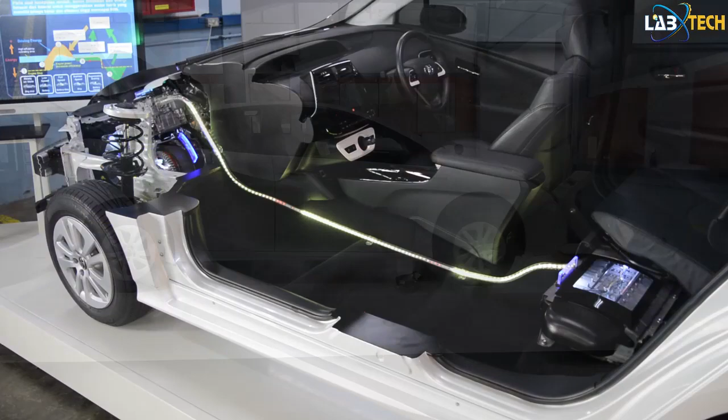This amazing piece of kit is also connected to a computer showing digital animation. Today we'll run through a quick demonstration video between Nyoman and I. So Nyoman, can you turn this on for us, please?

Sure. We have the control panel here to control everything - the software and also all the parts in the vehicle.

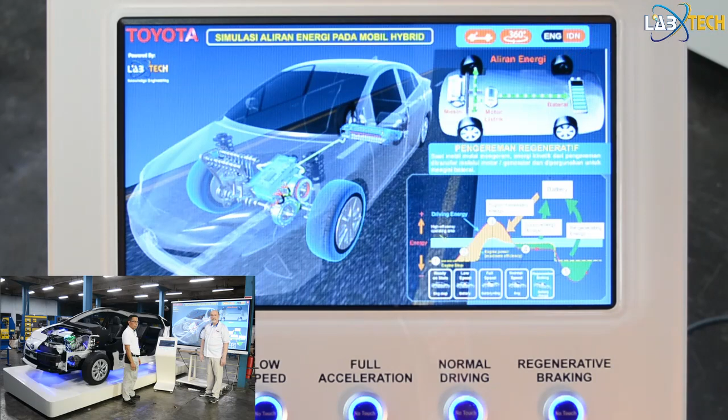As you can see, this is in Bahasa Indonesia, because this is going into a Toyota Experience Center in Jakarta where the public can be educated about hybrid vehicles - how a hybrid vehicle functions, what the technology is, why it's important to you as a consumer, what advantages a hybrid vehicle offers. Part of understanding those advantages is understanding the technology behind it.

It's complicated - hybrid vehicles are the most complicated vehicles on the road, the only ones combining mechanical and electrical items. The control and interface is quite astounding. We have a diagram here. Let's change the language - we're going to put this to English now. Now it's in English, as you can see.

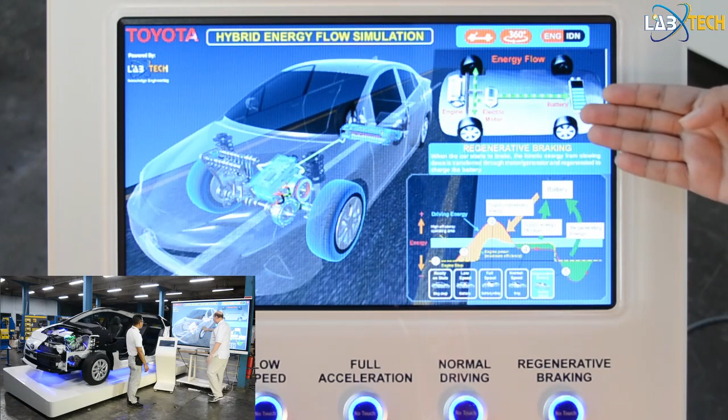We have a digital rendering of the Prius Generation 4 here, done by our digital department. We have modelers and scanners - we've been scanning in the 3D parts, modeling them and animating them. The digital modelers have created 5 different states of operation, the common ones. This is the easy way to understand this. The first is the ready on state.

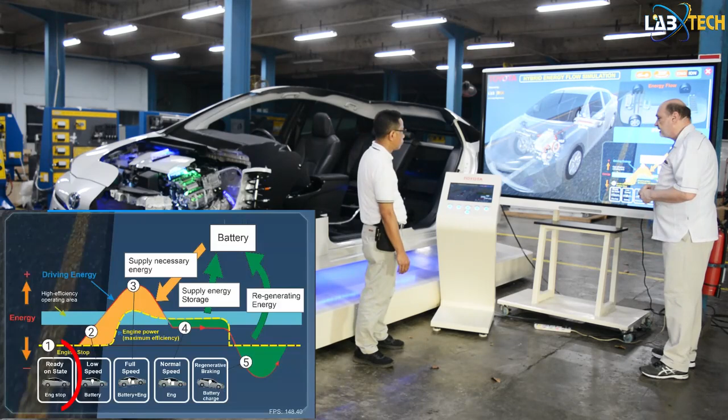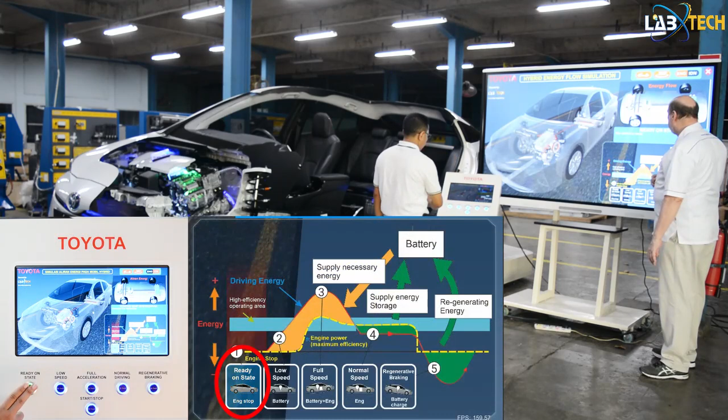Are we in the steady on state right now, Nyoman? Yes, exactly - this is the start position. So I will move it to the ready on state. Ready on state - okay, now as you can see, the lights have come alive. Tell us about the LEDs, Nyoman, what they're for.

So basically, as we've seen on the 3D modeling of the Toyota Prius, they have a high voltage battery over here - this is the battery. Then we have other components: the power control unit, the motor generator 2, the motor generator 1, and the power split device or PSD. And also the engine - that's actually the main components of the Toyota hybrid.

So you're saying it's got one engine - a petrol engine in this case, and we have 2 electrical motors, right? So what's the difference between these 2 motors? Why do we have 2, why not just 1? Very good question.

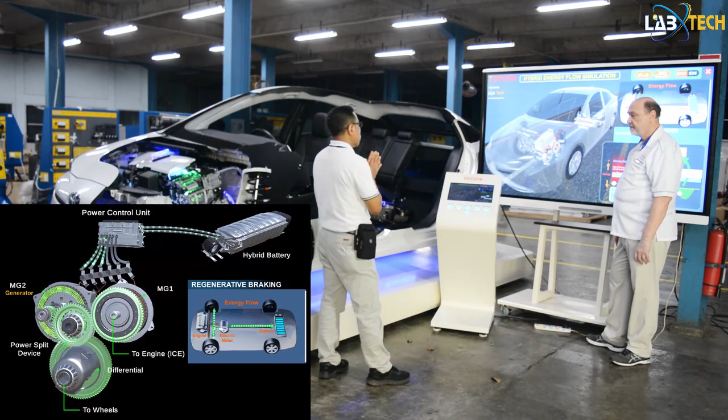So there are 2 motor generators - each is a motor and can also be used as a generator. Motor generator 1 is connected directly to the engine, so it's used to start the engine. This hybrid car doesn't use a special starting motor - there's no separate starter motor, MG1 is the starter motor.

So that's MG1, and MG2 is actually the main motor of the hybrid system, used to drive the wheels during low speed and during full acceleration. MG2 is also very important during braking, because it's used to regenerate power from the wheels - the energy from the wheels is reused to charge the battery.

That's amazing - so we'll see how these things work as we go through these modes. Let's try the first mode to see what happens, so we have low speed. We have a touchless control, by the way, because this is the period of COVID, so this is a no-touch display here.

Right, pretty interesting. So okay, you can see that this is flashing. We're now in low speed here.

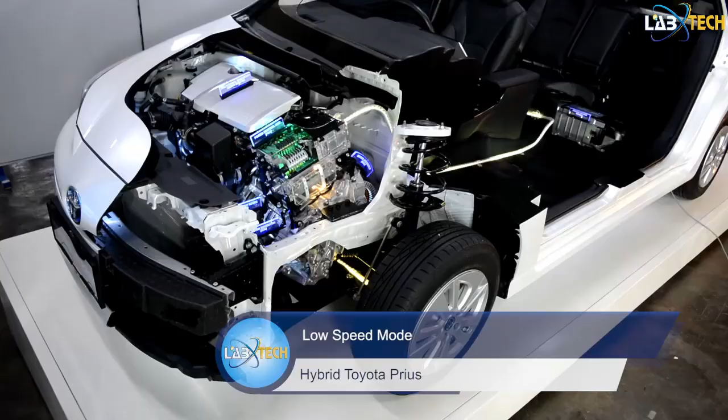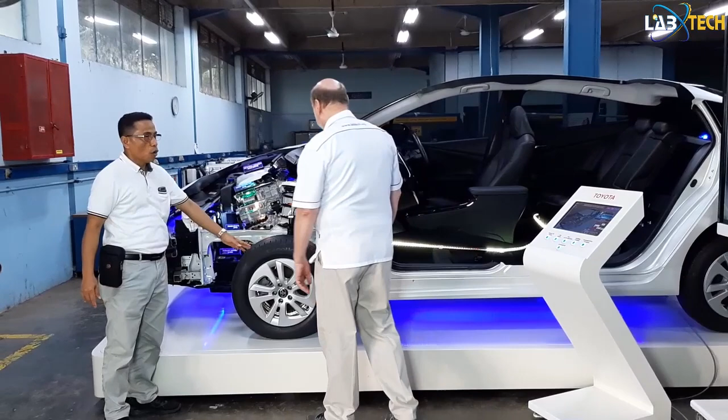So this is when you are just moving at low speed. The low speed actually in the Toyota hybrid uses the power from the battery, the energy from the battery. So we can see the energy flow from the battery is directly to the PCU, and drive the MG2 to drive the wheels. While during the low speed we use the battery.

This is also the simulation of the rotation of the wheels. So during low speed, the hybrid car uses the battery because during low speed the engine is not very efficient. The torque of the engine is low during low speed. That's why the motor is more useful, because if you have a power torque curve for an engine, at low speed it's not very efficient.

It's only when you get up to 2,000 or so RPMs and above that it takes off. That's why we have transmissions. So that's why electric vehicles are much more efficient - they don't have transmissions, do they? Exactly, because their torque curve is just flat. So that's why during low speed, it uses the power from the battery.

So you get the best of both worlds here, and the extended range of having a petrol engine.

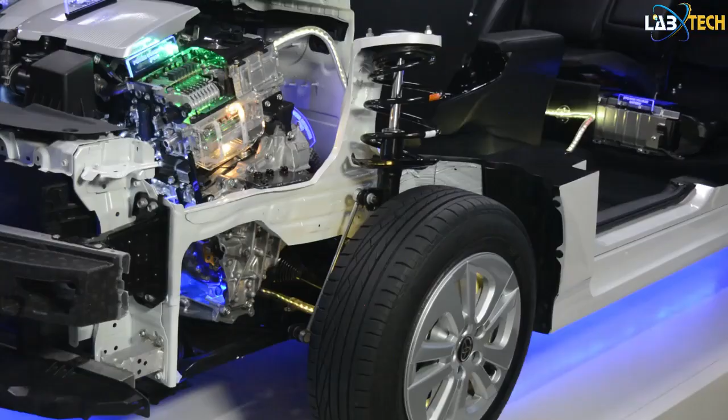Cool. So the flow we can see from the battery is the green color. It goes through the PCU and down to the motor generator 2, MG2, and then goes to the wheels.

And there's a special device that when we take a close-up you can't quite see it, but we have other sectioned items that show this - what we call here, the PSD. And that takes power from everything and transmits it to the wheels.

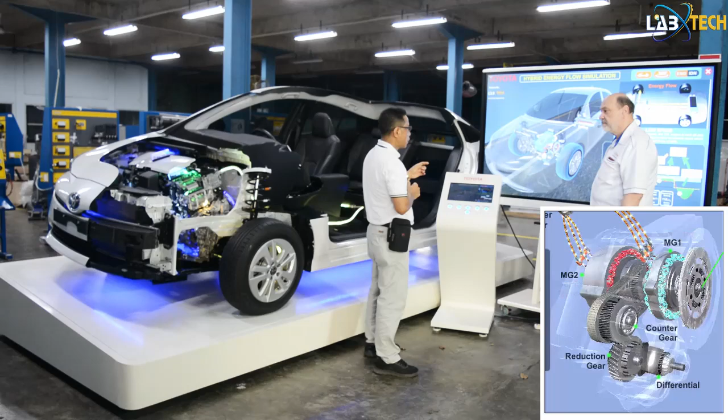You're exactly right. So the PSD, the power split device, combines the power from the engine and from the battery. It's the most important part in the hybrid transaxle, because during regenerative braking it's used to transfer the energy from the wheels to the motor generator two. But especially during normal speed when the engine is running, it actually connects the engine to the MG1.

So that's why we see that shaft connecting to the MG1 there. It's actually a kind of CVT transmission, so it doesn't have gears to change first, second, or third gear. It's running like a CVT, a continuously variable transmission.

That's about the closest thing we have, because this is unique to a hybrid vehicle, the PSD. It's kind of an evolution of a CVT.

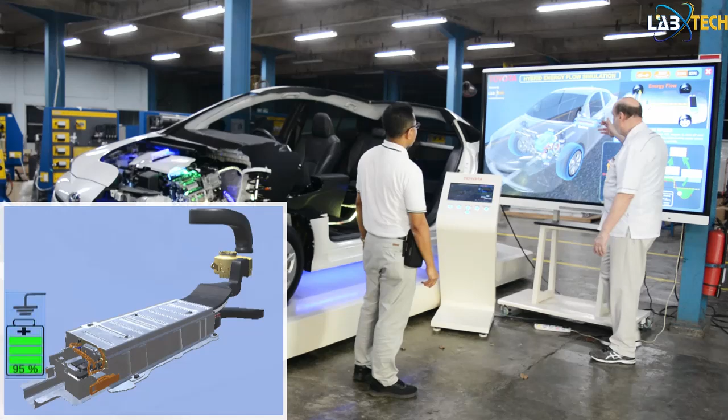Interesting. So this is low speed. In summary, low speed, we have the energy coming from the battery and powering the wheels, and this would be like you're going 5, 10, 20 kilometers an hour, not so fast, and not accelerating too much. Because the earlier versions of hybrids were known to be rather sluggish, and they didn't accelerate very well. But now that problem has really been overcome, where they can be quite quick, actually.

And particularly Generation 4 is a fantastic vehicle. The hybrid call it EV mode. And they've been developing where future hybrids will be able to be plugged in and the battery charged up just like an EV. So they'll have slightly larger batteries in the future, and they could be more EV mode.

Okay, so let's go then to the next one, which is full acceleration mode. After the low speed, usually we have to accelerate the car to go faster, to pass somebody, and take off. So let's see what happens - full acceleration mode.

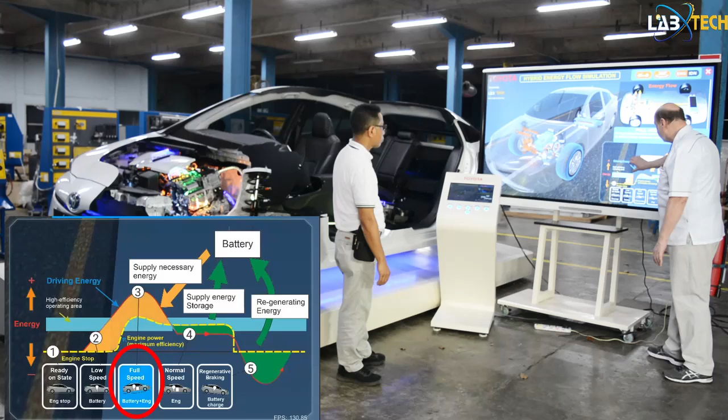Okay, so now we're in full acceleration mode. You see it's in this portion of the function, and we can see that now you're in accelerating mode where you have maximum engine power. And to do this, as I understand it, the MG1 and the petrol engine come to life - it's started by the MG1, because it's not running yet. So that starts it, and then you've got both power sources together. Is that what's going on? So show us on the engine here.

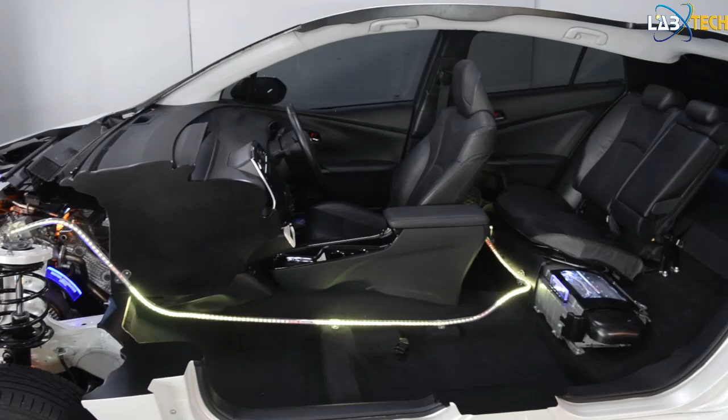From the lighting system, we can see here the energy flow. Energy comes from the battery, still using the energy from the battery, and at the same time the engine is running to supply more energy, so it is actually double the power.

So during this mode we can feel very responsive acceleration, very quick and very responsive. So the energy comes from the engine and also from the battery. The modes are controlled by the power control unit, which decides for you according to the program.

We're relating what's happening theoretically and in an animation to the physical vehicle here, which makes this display just so amazing. I mean, it took me quite a while, my background is automotive, to really understand what the hybrids were about.

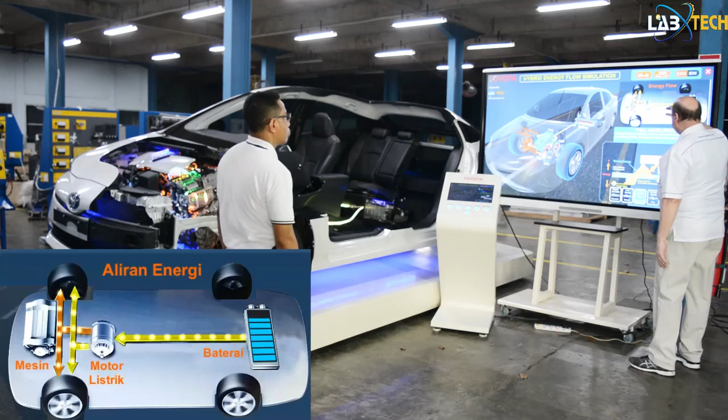This just makes it so any person could understand it, doesn't it? Yeah, right. And you can see here also there's another diagram which shows the functions. So right now we're getting battery energy, we're getting engine energy, and in the low speed mode the engine wasn't happening during this.

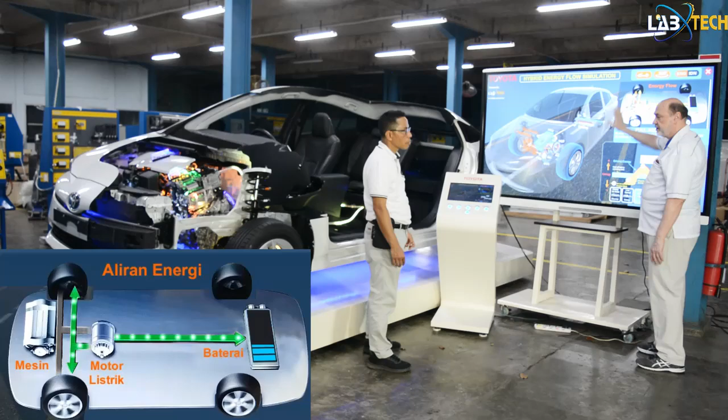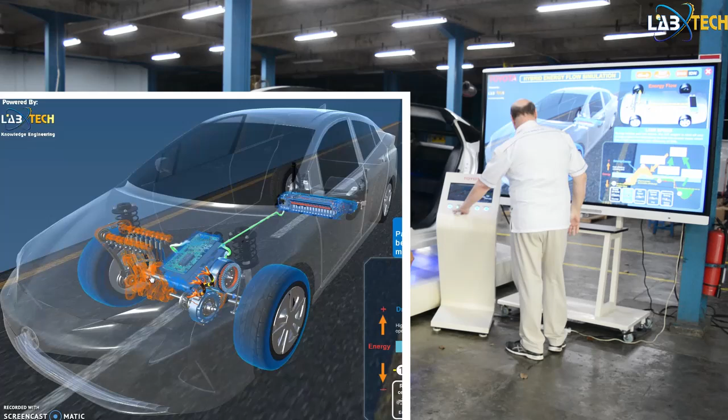And this is actually a very useful thing. You can see that the engine is now alive and running in this mode, whereas before it is not running. So in low speed this is off now, it's not running. So we go back to full acceleration. So it's really only during that acceleration you're now using the engine that much.

When else does the engine come on? Okay, very good question, sir. So the engine actually will run very efficiently during a certain speed, for example above 2000 RPM, the engine runs very efficient. So we can see from this chart, the engine power maximum efficiency here. So at that state, the hybrid system uses the engine to power the vehicle.

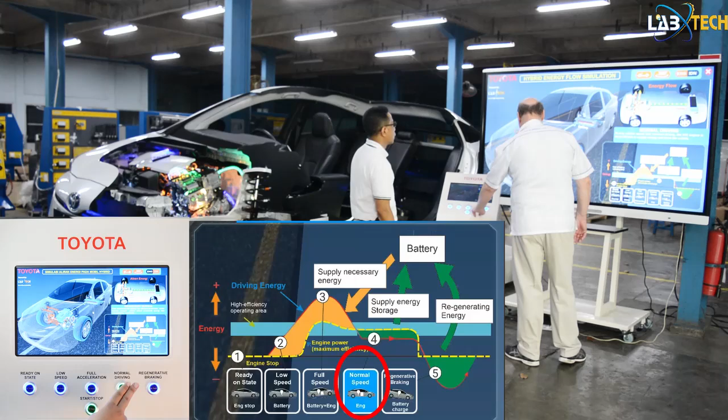Right, so is that what's happening during normal driving? Exactly, so here we're now on normal driving. Okay, I see what you're saying. So in normal driving, the engine is still on, but it's not using much, it's cruising, like you're cruising down the road at 100 kilometers an hour or 55 miles an hour, and you're not accelerating, you're just barely at that point.

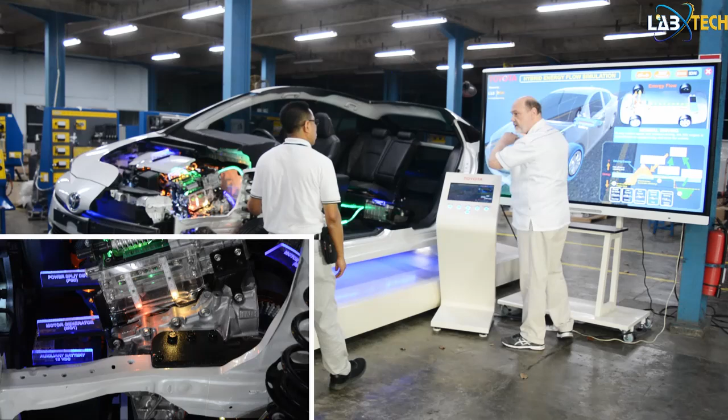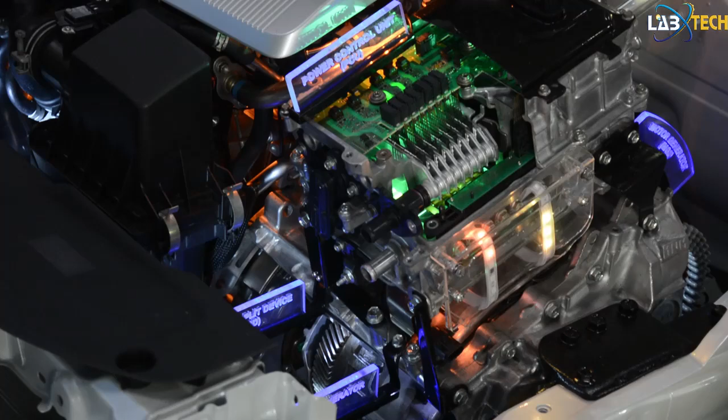So because during the acceleration we use the power from the battery, we use the energy from the battery, and during the low speed we use the energy from the battery, that means the level of the battery state will be reduced. So we need to charge the battery sometimes, and in this case the engine will charge the battery.

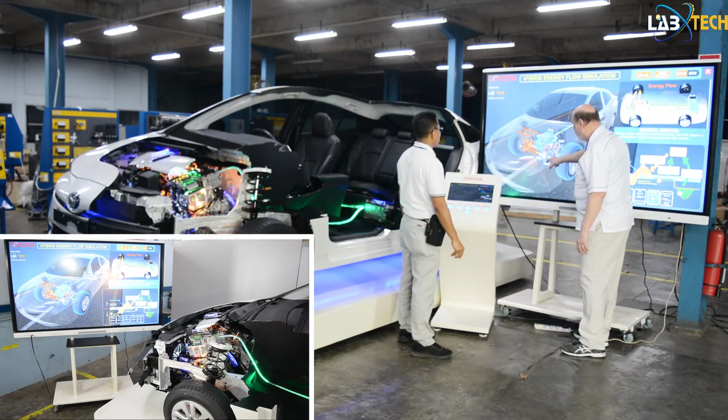So it's going through the MG1 in this case, and then the electricity is flowing back, and you can see the battery is filling up here. Back, yes, here, right, and also here.

The other thing also, once the battery is full, the energy from the engine also splits to add power to the MG2, and then gives more power to the wheels. So that's actually the function of the PCU and also the PSD during that time.

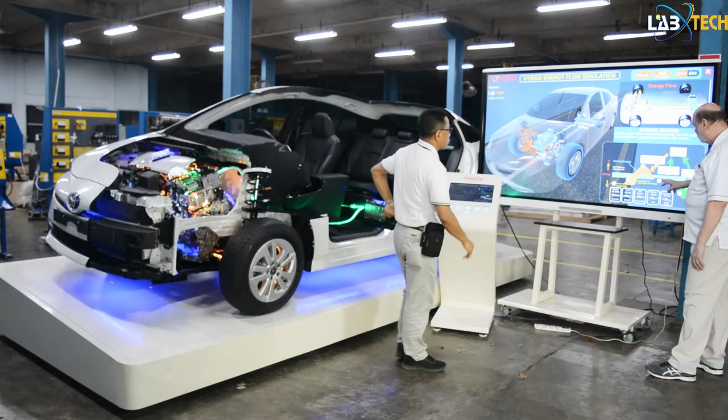So as we can see here, during normal driving, you're in this area where excess power is being stored back to the battery, and that's why you have such a long range in this. You're really just only using the engine when you need it, and you can go long distances in a Prius right now. You can go much farther than you can in electric vehicles, and plus you don't have to actually plug in, you just top up a little bit of gas or petrol, and away you go.

They're fantastic for long trips, and very economical too, in terms of miles per gallon or kilometers per liter. In normal driving, it will be much more efficient compared to the conventional engine, almost double, maybe 25 to 30 kilometers per liter, whereas normally it might be 14 kilometers per liter.

This one is 30 kilometers per liter. It's very efficient, double the performance, so it only takes half the fuel. But they're not twice the cost of a normal vehicle, just a little bit more.

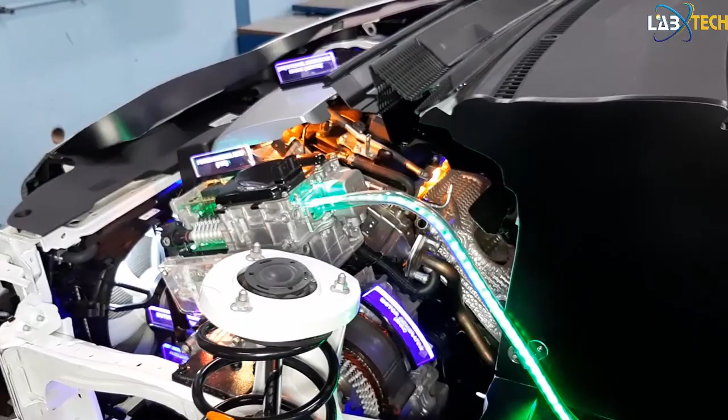In some cases they're not more at all, because particularly with Toyota you're getting a great vehicle, offered also in the Camry. There's hybrid, and it's not just the Prius, this technology is similar. The Camry and more and more Toyota cars are using the hybrid technology. I think they have some of the best hybrid technology around. They were one of the early ones, and they really put a lot into the development.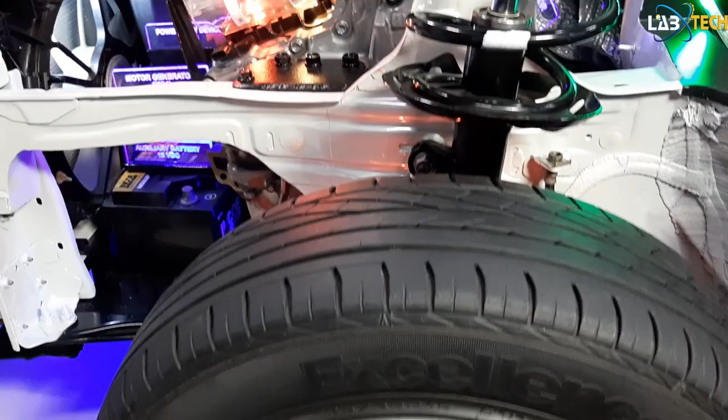So we've gone through normal, and we've got one more state here. I think this is always one of the most interesting ones: this is regenerative braking. Let's try that and tell us what's going on here for regenerative braking.

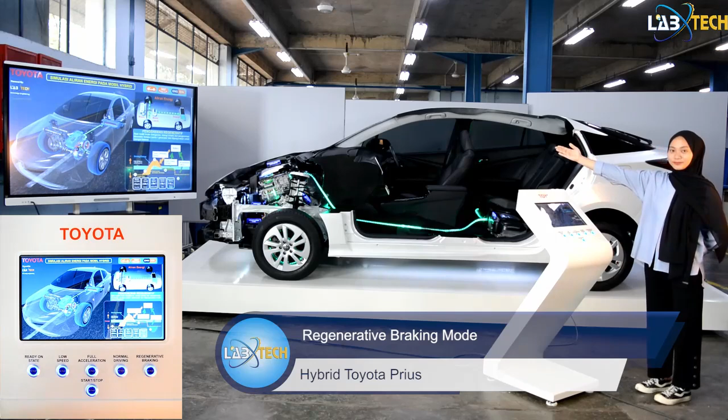From the diagram we see the energy flow from the wheels to the motor, then goes to the battery. Here we can see it also goes from the wheels to MG2, to the PCU, and then to the battery. The green color means the regenerative energy comes from the wheels, goes to motor generator 2, then to the PCU, power control unit, and recharges the battery. So when this is happening and you're actually braking, when you push on that brake pedal...

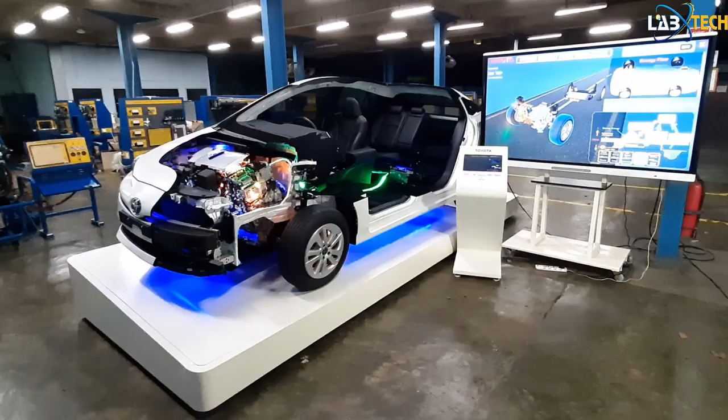Are the brakes actually working? That's a very good question. For the hybrid vehicle, even when we release the accelerator pedal, it is braking. You can feel it brake. So it uses the waste energy from the wheels to recharge the battery. When you brake, you really don't have to push on the brake pedal, you just let off the accelerator, and because you're telling the PCU there's no energy that you want, it just starts to stop, but not terribly fast, at a moderate rate.

So if you just want to slow down, you don't even have to tap on the brake. Right, but when we press the brake, that activates the brakes. Very interesting—you can see all that energy is captured and put back into the battery. It really captures a lot of the energy from stopping the momentum of the car and puts it back into the battery. The good point here is there is no wasted energy, all energy is used. It's a very green car, isn't it? Yes, really green.

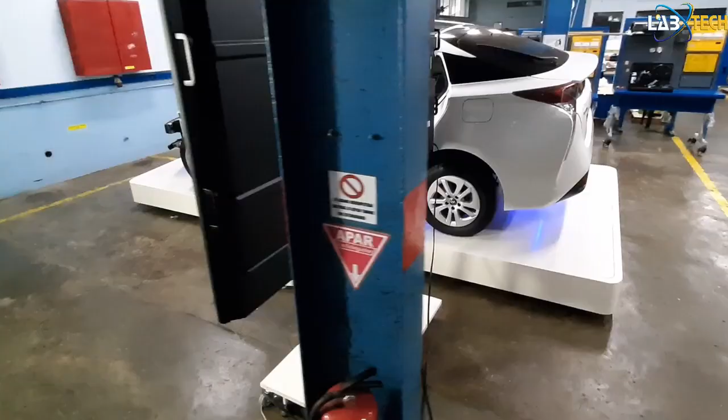We've had a lot of fun doing this project together with Toyota. It's really pushed our R&D department, which is why Nyoman is here with me today to explain this, integrating and developing this beautiful system, which is finished with a beautiful pearl finish that's absolutely iridescent—the camera doesn't do it justice—integrating the control panels with animations and the vehicle to make this fantastic educational experience.

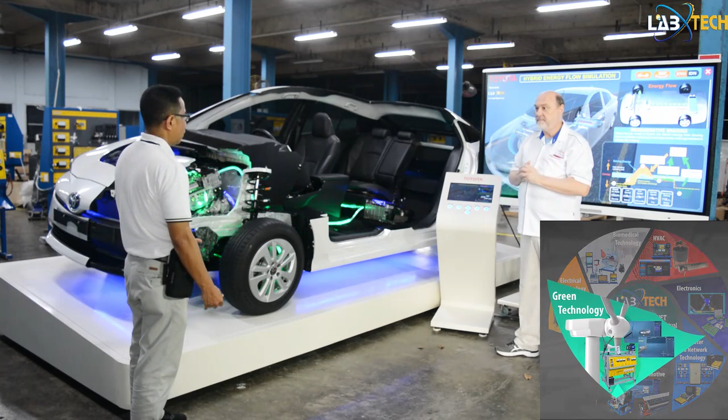Some of this technology, for our viewers who know LabTech, know that we do sectioned items, simulations, simulators, testing equipment and training equipment for automotive, electrical, IT, electronics, air conditioning, refrigeration, renewable energies, green—in fact this is part of our green and automotive lineup, both. It uses everything: electrical, electronic, it's a computer on wheels, it's also automotive. But automotive is becoming more electrical, electronic, and IT.

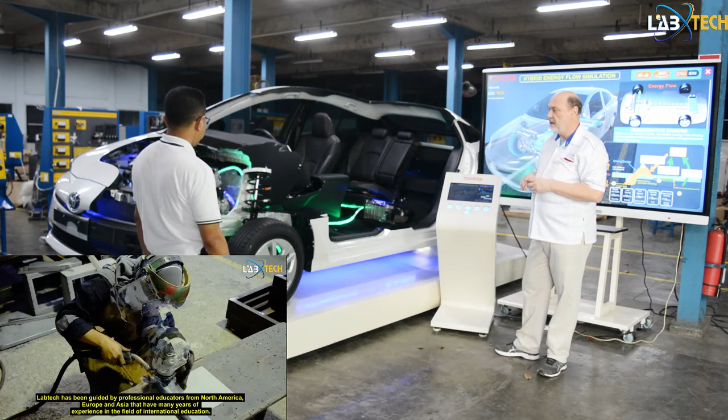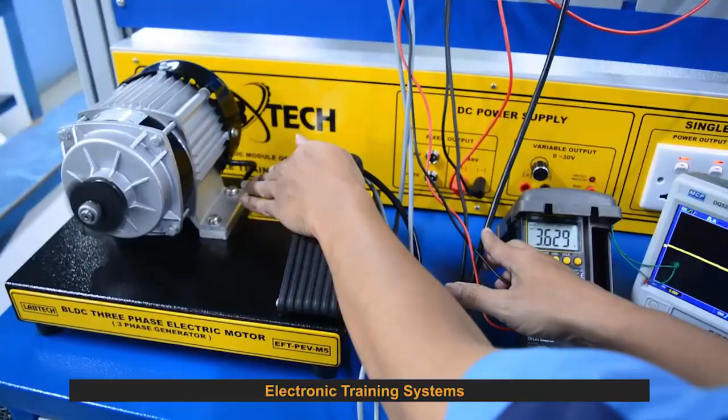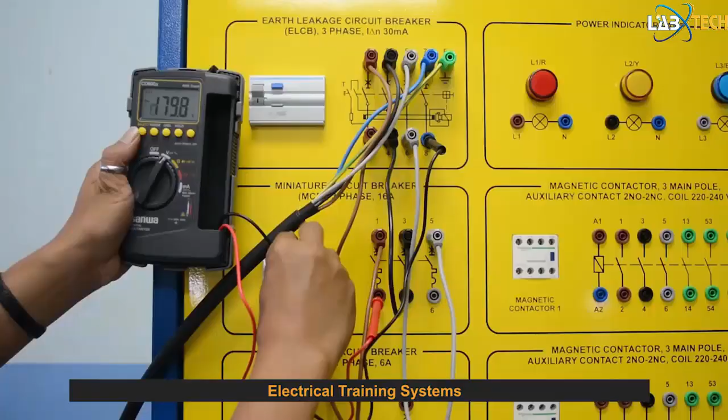It's becoming less mechanical over time, and as electric vehicles come out there will be less moving parts, which is a fantastic evolution. This is important not just for consumers to understand, but of course mechanics and service people who we train in many countries. LabTech's equipment is used in over 80 countries around the world to teach mechanics and technicians about this type of technology. What Nyoman and his team have pioneered, we'll be seeing some of this come out into our regular line, particularly the level of sectioning and the LEDs we're already using in our standard products.

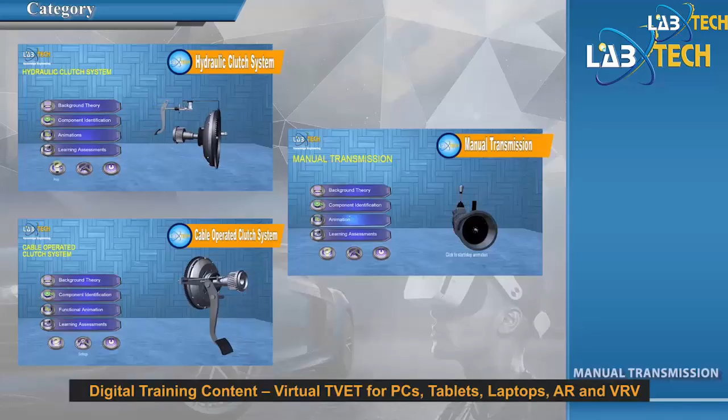And with this integration, we also have the LabTech Academy that has full content of learning about hybrid vehicles. We're coming on designing electrical vehicles, but also the regular things from basic electricity, electronics for automotive, to starter motors, fuel systems and things like this. The LabTech Academy is very interesting.